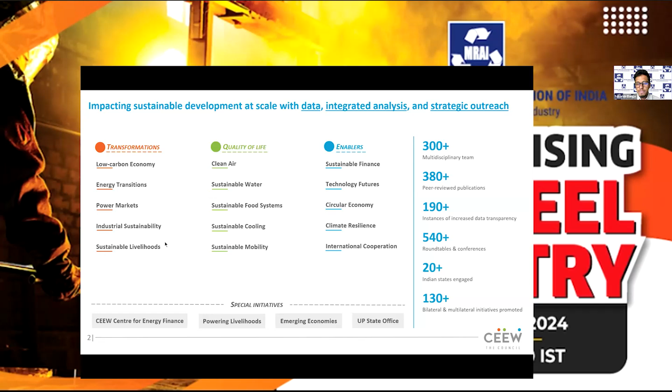In 2020 - so about 4.5 years now - I've been working on steel decarbonization, among other topics. Our team has been working very closely with the Ministry of Steel in developing new policy for green steel production in the country, and we've been involved with deliberations and discussions with several committees within the ministry for the past 2.5 years. Based on our research and discussions with industry, I'd like to present today about the different pathways and what likely pathways are going to happen for the Indian industry to decarbonize. Also considering the country has set a net zero target for the year 2070, we don't have much time left.

I'm sure everyone attending already knows about the general pathways of steelmaking, but for the benefit of those who don't, here's a short slide on the two broad methods of steelmaking. The first is the oxygen route, or integrated steelmaking, where iron and metallurgical coal, also known as coking coal, are melted together in a blast furnace, producing pig iron. This pig iron, along with some scrap and alloying elements, is charged into a basic oxygen furnace, where you control the amount of carbon in the iron and get steel.

The other process is called electric steelmaking, or DRI-based steelmaking. Here, you don't necessarily melt the iron, but reduce it under high temperature in a furnace to get direct reduced iron. You can use any type of non-coking coal, like regular medium-grade coal, or there are processes that use natural gas. The resulting iron is then melted in an electric arc furnace, or an induction furnace, to reduce the carbon content and produce steel. DRI can be produced with both coal-based and gas-based processes.

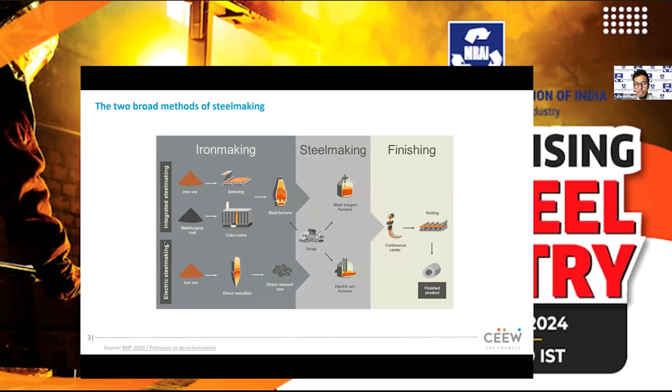We're really trying to retrofit existing designs with new technologies and fuels, and they can only go up to a certain amount before it becomes difficult to control the process normally. There are multiple different pathways or routes of steel making based on how you combine the different technologies and types of raw materials, but we can broadly say that these are the two big pathways.

Coming to the Indian industry, it's the second largest in the world. We have more than 150 million tons of crude steel production capacity, and we produced actually more than 120 million tons in the 21-22 financial year. And the big story for the decade is that we plan to double our steel making capacity by the 2030s. So there's going to be a lot more steel coming out, which means a lot more coal and iron ore going in. So then the challenge is, how are we going to grow sustainably if this is how much our demand for steel is foreseen by the industry?

In India, there are 5 major steel making routes as we see it. So there are some oddities - there are one or two plants here and there that use entirely different technology, but then we just combine them into the most relevant category for simplicity.

You have the BF-BOF process, which, as I mentioned, uses iron ore and coking coal. You have the gas-based DRI and EAF. You have the coal-based DRI with the EAF. And then you have the coal-based DRI with the induction furnace as well, called the IF. And then you have induction furnaces that purely melt scrap steel and produce recycled steels from scrap.

So the interesting thing about the Indian scenario is that the electric route has a higher share of final crude steel production than the oxygen route, which is contrasted by the rest of the world. If you take the world average of steel production, more than 70% of the steel globally is produced using the BF-BOF route, and only about 30% is coming from the electric route.

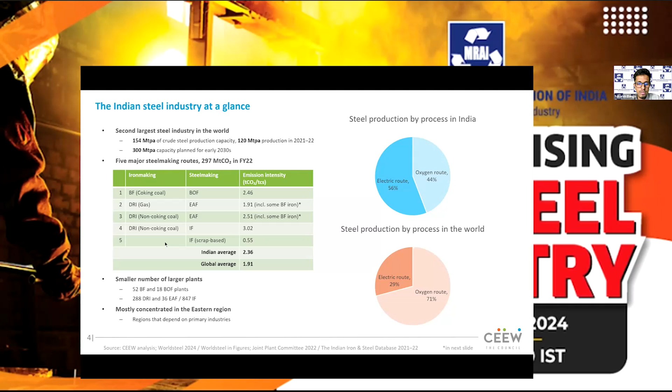Now, there is an asterisk here where I say including some amount of BF iron, and I'll just show you why that is the case in the next slide. Because while we do talk about processes in sort of compartments - that oh, this is BF-BOF, this is DRI-EAF - it doesn't work like that in practice. There are lots of combinations that industries adopt based on the equipment they have available, based on the quality of steel they want to produce, and how they control the processes within the plant. So if you see the arrow marked number 1, you see that some amount of iron from BF goes to EAF. It's not necessary that it's only a BF-BOF process, right?

This is because some plants also charge pig iron from the blast furnace into EAFs, primarily to reduce electricity consumption in the EAF and also to somehow control the quality of steel coming from the EAF.

Arrow mark number 2 shows some very small amount of coal-based DRI-EAF capacity in the country. This is primarily in large integrated steel plants with multiple technologies within the same facility. They will have a blast furnace, a basic oxygen furnace, some DRI kilns, and electric arc furnaces. This is simply based on the economics, how the industry grew, and what grades of steel they produce, so they mix and match processes to suit their needs.

The third is probably more interesting for our cohort here on scrap. Every steelmaking process uses some amount of scrap. 10 to 15% of scrap is blended with iron when it goes into the steelmaking process, but this can go much higher. If we're able to recycle scrap, that's a win-win because we get rid of waste materials and produce new steel without having to mine new coal, mine new iron ore, and cause a lot of supply chain issues.

Based on the current configuration of these industries, the technologies available to us, and the best-case pathways for decarbonization, I personally see three major routes for how our industry could grow and decarbonize. The first route is to use existing technology, to grow using the existing coal-based BF, BOF technology, which is what industries are primarily erring towards for capacity expansion. Most of it is based on BF, BOF technology coming in.

We can take this existing technology and deploy the best available practices and technologies for improving energy efficiency. We can put in better process control, more efficient drives and systems, better cooling mechanisms. All those things we can do. We can replace whatever power consumption comes from the grid or from a coal-based power plant with renewable power, and then potentially blend some amount of sustainable fuels with coal or sustainable raw materials with iron ore to reduce our emissions. However, this is limited by the process, and whatever remaining emissions there are, we go for carbon capture and utilization or carbon capture and storage.

The second route is to deploy gas-based capacity, because the gas-based technology that exists for DRI and subsequent steel production can switch to green hydrogen incrementally. There are companies who claim they already have commercialized technologies that can use entirely green hydrogen for producing steel. So that gets rid of the coal problem and the coal-to-gas switching problem, which is a limitation in terms of technology. We use a technology that already uses gas, switch from natural gas or gray hydrogen to green hydrogen subsequently, and whatever other energy comes from electricity, we switch that to renewable. So then we produce clean steel.

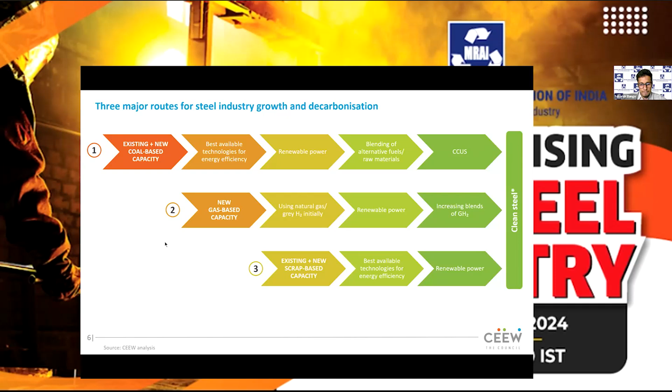Let's take the first route as an option. If we look at the existing capacity and existing technology, there is going to be a heavy reliance on carbon capture for decarbonization. No matter how efficient you make the process, no matter how much alternative fuels you blend, they're only going to go a certain amount of the way to decarbonize, because this is an existing, well-established technology that has evolved for centuries. There's only so much you can do in terms of augmenting an established process to reduce its emissions.

You can't simply switch out coking coal for green hydrogen, for example, because that's not how that technology functions. You need some amount of solid fuel in that blast furnace so the process happens normally, so that the weight of the iron ore is borne by that coal bed at the bottom. That means you can't simply replace a solid fuel with a gaseous fuel and try to reduce your emissions.

Even if you switch your entire electricity consumption to RE, the electricity consumption is only a small part of the emissions from the whole process of steel making. Even if you switch your existing capacity to RE and put in 6 gigawatts of new renewable power, round the clock renewable power - and round the clock is important because steel plants operate round the clock - you can't have a solar power plant producing peak power at 2 p.m. and then tapering off, relying on the grid again.

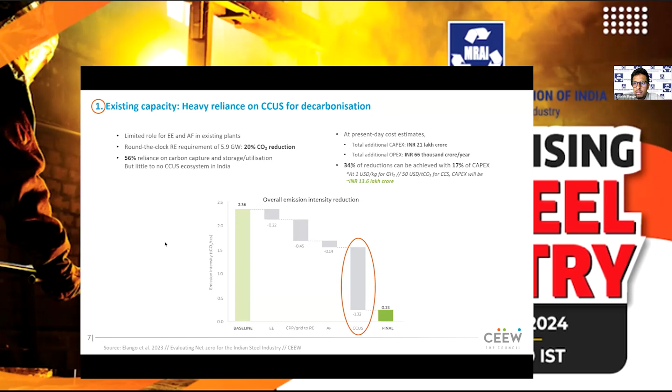However, if the cost of CCS declines, if it becomes $50 per ton of CO2 from the 90 or 100 that it is right now, we could potentially be looking at a bill of 13 lakh crores rather than 21. That is still a large sum of money, and we need to plan where we get the money from and how we will put it into the ground to develop these technologies in the coming decades.

On this slide, I won't dwell too much, but essentially it's saying that if you try to produce clean steel, that is near net zero steel using existing technologies plus CCUS, it would probably be 40 to 70% more expensive to produce at current prices. And if the cost of CCS declines from 90 to 50, it could still be 20% more expensive than it is currently. That's not a small number. 20% is a lot. So steel that costs 25,000 rupees to produce would become 30,000 rupees, with knock-on impacts in every other sector that uses steel.

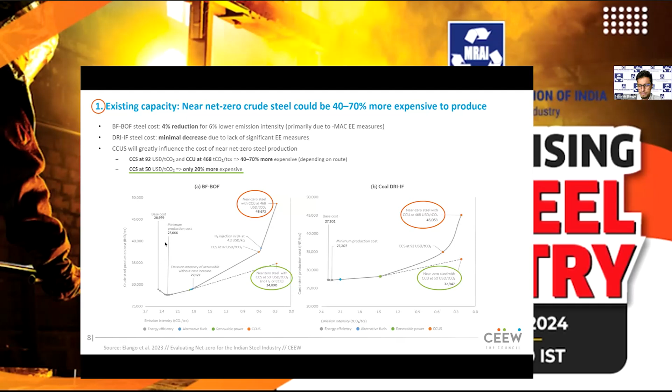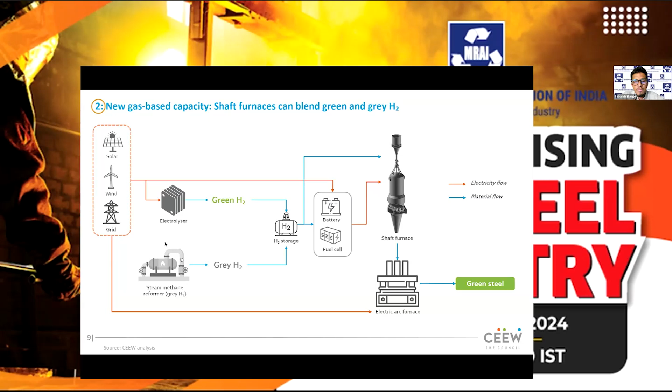What about the second route? If we look at hydrogen-based steel making, we can do that. There's already a plant in the country, actually a couple of plants, that use gas-based technology. Let's say we take a shaft furnace, which is the gas-based technology to produce DRI, and instead of using natural gas, we use gray hydrogen. Gray hydrogen is produced by reforming natural gas and costs much less than green hydrogen. So let's say we operate a shaft furnace using gray hydrogen, put that into an electric arc furnace powered by renewable energy, and then subsequently blend green hydrogen into the process going forward.

This chart is a little confusing, but the key messages are on the left. The new gas-based furnaces are already capable of using green hydrogen, so we can initially run them with a combination of gray hydrogen and RE, reaching emissions of around 0.9 to 1 ton of CO2 per ton of crude steel, right down the middle of the chart on the right. Then, as you keep blending green hydrogen with gray over time, you'll reach 100% green or clean steel. The cost premium will keep going down as the cost of green hydrogen reduces. So if you take a 2040 case, the dark gray line, blending 90 to 95% green hydrogen, you could be looking at emissions of only 0.3 tons of CO2 per ton of crude steel.

Another interesting insight from this graph is that if you read it from right to left, towards the very end, prices go up substantially. This is because producing 100% hydrogen-based steel requires producing hydrogen round the clock, meaning you'd need round-the-clock renewable energy. That means the cost of energy storage, the most expensive component, goes up. So if you blend 90% green hydrogen, you can do away with a certain amount of storage and have the rest come from gray hydrogen. But for 100% green hydrogen-based steel, you'll need a lot more marginal storage to deal with the intermittencies of RE, which drives the cost up. This is a strategy we have to evolve with time based on how storage prices reduce, how green hydrogen production costs reduce, and how we can effectively blend green and gray hydrogen in a shaft furnace.

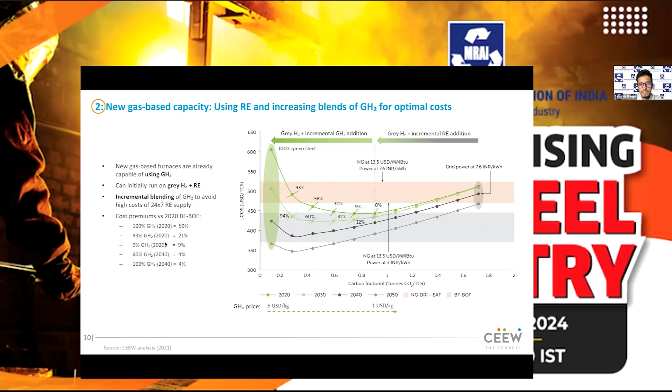And now we come to the third case, scrap-based capacity. Here, how would we go about augmenting the supply of scrap, and how would we go about supplying renewable energy to these people? 10 to 12% of scrap is charged with iron in all steel-making furnaces in the country typically.

Importantly, more than 10% of the steel produced in India is produced primarily through the scrap recycling route. These might not be very high quality products, but still it counts nonetheless. India consumes 25 to 30 million tons of scrap annually, of which around 5 million tons is imported scrap, because we simply do not have the logistics to make domestic scrap recycling work to the scale that we needed to. And as I mentioned earlier, a large part of the scrap is actually generated within the plants, so you can't even say that it's end-of-life steel that counts for zero emissions.

There's a lot of scrap also generated from shipbreaking in India—India is, I think, one of the world's largest shipbreakers. We need to formalize that sector such that large amounts of steel scrap are available from a particular location, which makes transport and logistics cheaper. So how would we augment supply?

Shipbreaking is something we already discussed, but the recent vehicle scrappage policy instituted by the government is having high hopes for the steel sector, because there are a lot of formalized scrap recycling sources that will be made available by way of vehicle scrapping centers. That means it's going to be formal, higher quality steel used in automobiles, and that means logistics and transportation will also be cheaper and more efficient. So this is how we are looking at augmenting scrap supply right now.

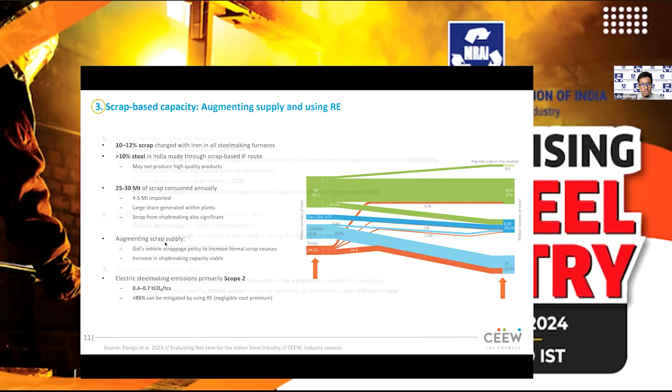So now we have 3 questions in the end. Overall, how are we going to grow? Is it going to be using existing technology? Or are we going to build gas-based capacity and switch to green hydrogen later? Or are we going to prioritize scrap-based steel?

If we look at the first point, most of the new capacity that is going to come in is going to be based on coal-based capacity. This is what we have come to know from industry and various stakeholders—because of issues with availability of natural gas and the prices of natural gas currently prevailing, industries are saying they can't produce competitively priced steel using the gas-based route right now.

And even though it might be great for the future in terms of easing their transition, today's demand and today's market still influence today's decisions. That's what I can say about this. And so because we are going to expand using coal, we will soon have 250 to 300 million tons of capacity running on coal.

That means much more reliance on a CCUS ecosystem that doesn't exist. So if this is the way we are going to go, we have to urgently develop CCUS policy for the country, and urgently develop indigenous technologies for carbon capture and utilization that do not rely too much on imported technologies that drive up costs.

And we need to be aware of the fact that RE, alternative fuels, and energy efficiency, while they don't individually do that much in terms of reducing emissions, are collectively very important for at least dealing with half of the emissions coming from this technology. And this is not even delving into the issues regarding coal supply, coal quality, iron ore supply—I'm not going to comment on those at this stage.

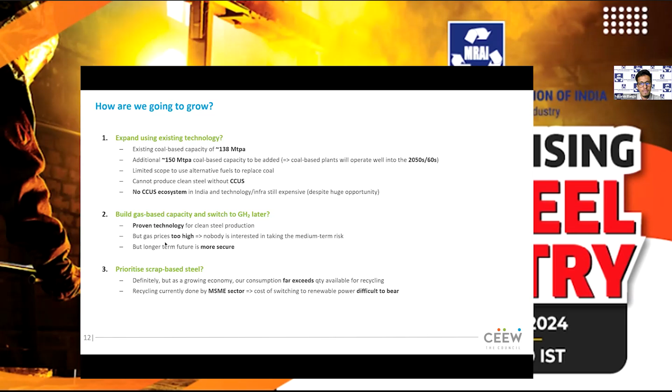That was the end of my presentation.

Good. Thank you very much for the kind introduction earlier, Commodore. I'm going to rapidly go through the slides here because it's way in excess of the amount of time that's allotted, and some of the information I'm going to present has already been spoken about.

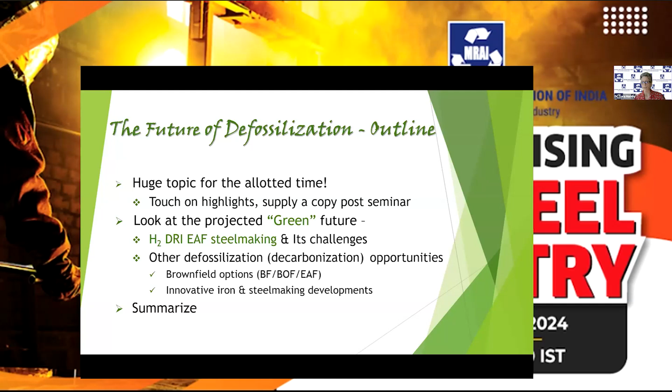As we all know, the International Energy Agency, IEA, in Europe has projected the new future to be hydrogen DRI melting in an electric arc furnace. But there are some major challenges with that, which I will go through, and look at some other defossilization options for the brownfields, and look at some of the new innovative technologies coming up before I summarize.

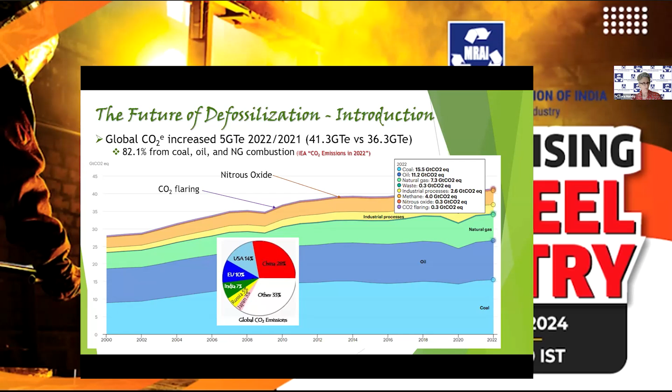We all know we've got a problem meeting the 1.5 degrees C target. Last year, 2022 over 2021, increased the CO2 equivalents by 5 gigatons, and most of that, 82%, was coming from coal, oil, and natural gas combustion. China, of course, is the largest problem because of the intense blast furnace usage. USA is second, then EU and India at 7%.

We, as a steel industry, have the second lowest carbon intensity for metals production. The major emissions are predominantly from the blast furnace at 1.3, then the coke. Third is the electric furnace at about 0.24.

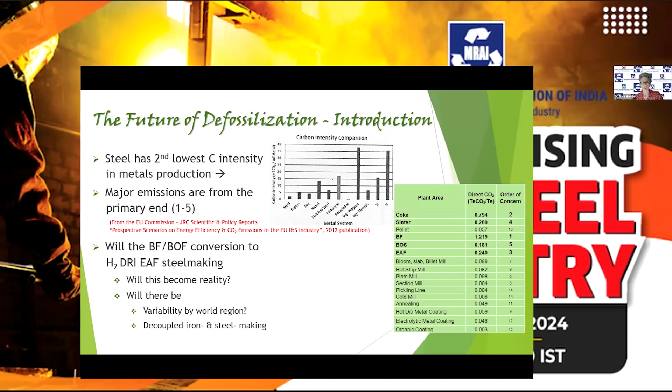The question has become whether the blast furnace will convert to EAFs, and whether there will be variability around the world because of the infrastructures throughout the world, and whether we need to decouple the iron making and the steel making.

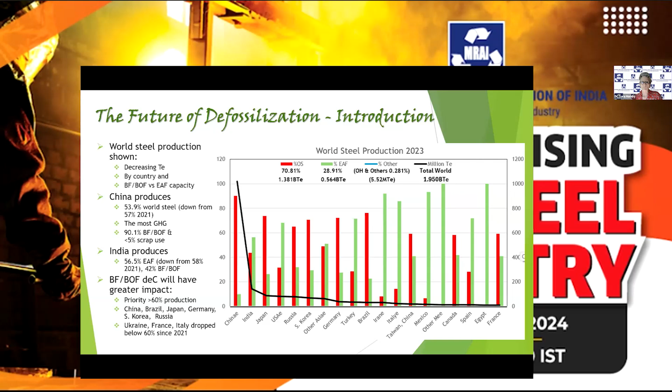This is just the 2023 world steel production from the World Steel Organization. The red is the BOF blast furnace, BOS route. The green is the electric furnace. The black line is the tonnage from each of the countries. We all know China produces the most—it's actually dropped to 54% from 57% in 2021. The greatest impact is going to be addressing those countries that have over 60%, or even 50%, blast furnace use.

The Paris Accord is demanding 0.2 tons of CO2 per ton of steel by 2050. We're now at about 1.7. We've already seen the 7% greenhouse gases, 11% CO2 coming from the steel industry. Blast furnace accounts for 92% of the greenhouse gases from the steel industry, yet it's only producing 72% of the steel.

If we look at the strategy for 2070 from the IEA, they're looking at 95% hydrogen DRI, but the problem becomes the build rates—sorry, the sourcing of the green consumables, prime scrap availability, and the DRI ore quality. We're also going to have big problems with zero carbon DRI in the arc furnace, which is inherent with 100% hydrogen, the lack of CCUS tonnages throughout the world, the geographical viability of actually sequestering it, and the socioeconomic impact of closing blast furnaces.

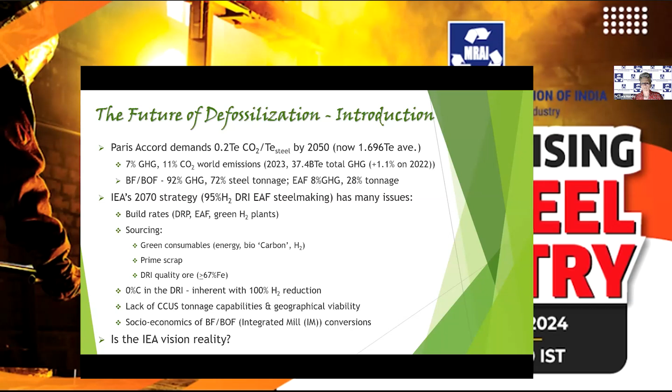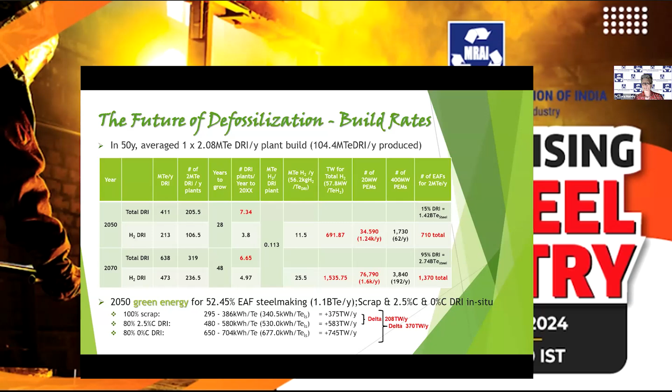That's 1,240 20-megawatt PEMs per year for construction. And added to that, if you go to the extreme and put 80% zero carbon into the electric furnace, you're going to need another 370 terawatts of power to actually melt the material.

We need green hydrogen, we need energy carbon replacement, and prime materials. For the economics of hydrogen use in steelmaking, we need to see hydrogen at less than $2 a kilogram, and it's currently between 3 and 8, depending on which part of the world you're in. We also need energy to be much, much less than $20 per megawatt.

Production is insufficient. By 2050, with 213 million tons of DRI, we need 11.5 million tons of green hydrogen. In 2022, only 0.11 million tons were green, which was a 44% increase year on year.

The figures for 2023 production of green hydrogen I couldn't find anywhere, but electrolyzer capacity had doubled to 8 gigawatts. In December 2023, 45 million tons of clean or green hydrogen projects had been announced, but the investment was $570 billion.

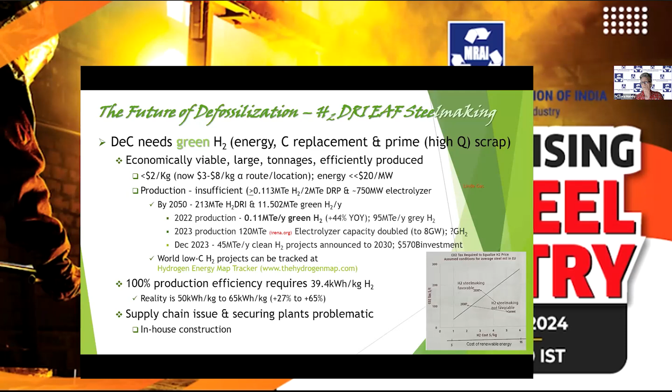In terms of energy, a great source is the Global Energy Monitor. I'm sorry you can't see everything underneath the pictures on the right. What I did was take their energy monitor graphs and superimpose the actual production in 2022 and 2023, so you can see the difference in terawatts produced by different methods.

Basically, if we go green in the industry, especially the electric furnace, we will save up to a kilogram of CO2 per kilowatt used. In 2022, we were looking at almost 180,000 terawatts of total energy produced.

They announced 60 gigawatts of green capacity coming on by 2030. Renewable energy was only 29% that year. In 2023, renewable energy increased slightly to 30%, but it was down slightly because of the drought in China.

The current additional capacity reached 0.5 terawatts. There's not enough green energy at the right price. We need a 50% reduction in pricing, and we need a $2 trillion investment in renewable energy. We're going to need 2 terawatts for every 2.5 million tons of steel per year produced.

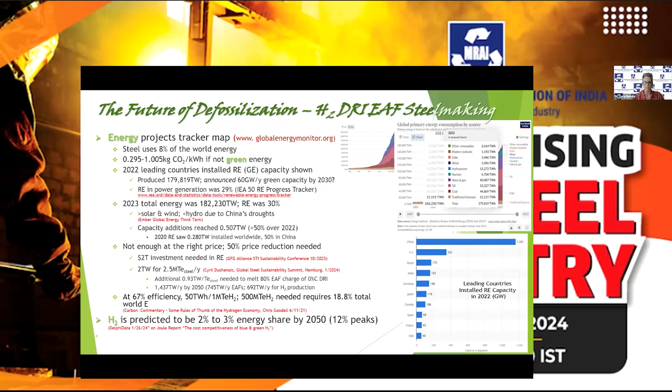For carbon substitutes, we're looking at 95% efficiency of the carbon contained in either pig iron or DRI as it comes into whatever melting furnace. We need that carbon currently for chemical energy, for foamy slag production, and for recarburizing in certain circumstances.

People are looking at replacing it with biochar, plastics, rubber, and municipal waste. Firstly, there's not going to be enough sourcing for that. But also, most of the research to date has shown that you need carbon injection with whatever the replacements are for it to work in an electric arc furnace.

In terms of CCUS capabilities, it will address 54% of our hard-to-abate fumes. However, it's a relatively high conversion cost because you need carbon-free hydrogen to chemically stabilize the CO2, and the fixation is limited. Sequestration, as we've already heard, is geographically challenged.

And if it's not mineralized, it's going to be temporary. The end users are predominantly food, chemical, and enhanced oil recovery industries, and they can't use all the CO2 we could convert, so we need to find other uses.

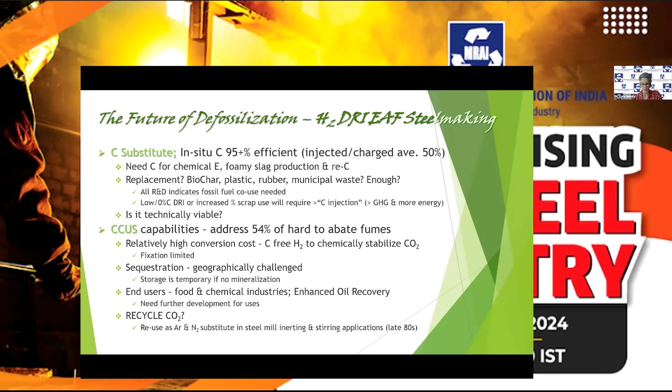One question I asked a long time ago - we had done a lot of work putting CO2 in place of argon and nitrogen in various steel mill and other non-ferrous applications. We found it to be very efficient in terms of inerting, stirring, and even in an AOD vessel. So that's an option for using the CO2.

Ore quality is another big issue for the world. Only 3 to 4% of the DRI is greater than 67%. The quality is deteriorating - the iron content has already dropped 2%, silica and aluminum have increased 2%, and phosphorus is going up by 0.02%.

Upgrading the Pilbara ores in Australia - and Australia is the largest producer, as you can see from the graph at the top there - is an issue. So they're looking at potentially redirecting it to a submerged arc furnace and then on to the BOFs.

There's an increasingly low availability of lump ore, and a lot of people are now restricting the ore to their own internal markets. The other option, of course, is to develop new process routes for the beneficiation of the ores.

Swinburne University and CSIRO in Australia have looked at this, and they've developed a lab-based pilot plant for fluxed magnetite pellets, which potentially reduce the cost of processing. It reduces it by one step, and it also does the magnetite processing at a lower temperature than normal.

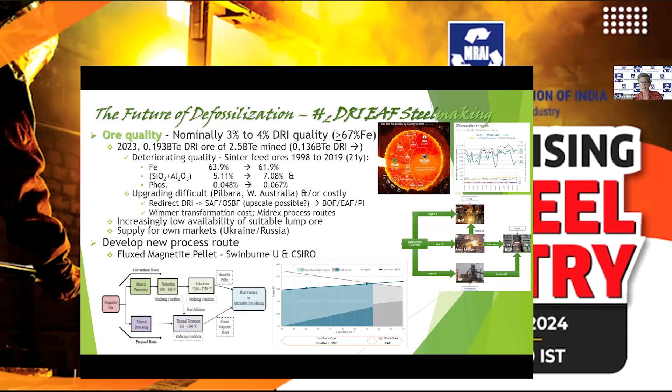Scrap, we've already talked about quite a bit. Most product issues ultimately can be traced back to the melt shop and the scrap quality. The scrap quality will define the amount of OBMs required in a furnace, and the little chart at the top shows the need in the US predominantly for good quality DRI, HBI, and scrap to make auto sheet.

The continuous recycling of scrap is going to be a big problem because it's going to increase the copper significantly. We've already seen an increase of 0.12 from '82 to '19. We can shred the scrap to make sure we remove all the copper coming in from the auto scrap. It also densifies it, cleans it up, and gives us a better yield.

One of the issues I've complained about for many years is that scrap is not sold to exacting qualities like ore is, and we need to motivate, in North America especially, the scrap dealers to guarantee quality coming in. I've seen a lot of problems in furnaces where the mix has been back-mixed to give a standard quality, and it's caused problems. So we also need to have a continuing analysis of scrap coming in.

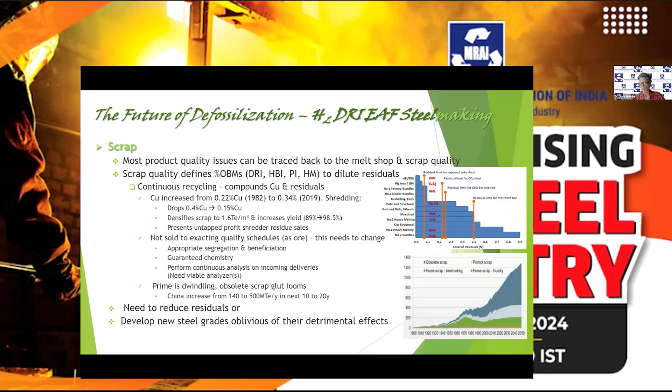We're going to use a scrap-based process, and we need to look at reducing the residuals somehow. There's a company in Canada looking at chemically reducing the copper, but it's still under development. Or we need to look at new steel grades that are oblivious to the detrimental effects of these residuals.

If we have zero carbon coming in from 100% DRI, we're going to have some major challenges. Without the chemical energy and the chemical carbon reaction capabilities, we're going to have incomplete reduction of the FeO, less metallization, and more gangue in the furnaces.

If we have lower carbon steel, we're going to have more FeO in the slag and lower yield. We're going to have higher melting temperatures and more electrode wear. And when we're injecting carbon equivalents, we're going to need twice as much because of the lower efficiency.

We're going to need to redesign the refractories in the arc furnace because the carbon in the current bricks is going to basically dissolve. There's going to be slag erosion, and we're going to need a much deeper bath for the chemical reactions to take place.

We're going to have more slag formers and more disposal weights. We're going to need to stir the bath because it's going to be too deep for the electrode energy to stir it, so we're going to have plugs, tuyeres, and injectors in place. But we could also use CO2, which would reduce the need to make argon and nitrogen.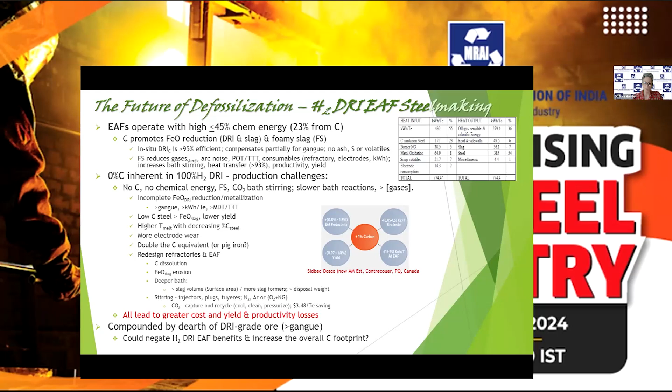All of this is going to lead to higher cost, and yield and productivity losses. And it'll be compounded by the lower quality ore that's available out there right now, and it'll increase the carbon footprint.

Transition costs are exorbitant. There's some numbers here from Arcelor, POSCO, Thyssen, and Algoma Steel. I calculated from the IEA's own numbers that the cost of liquid steel would be $1,327 a ton. And the CRU actually quoted crude steel product at $3,700 per ton if we went the way they wanted to go, and that would make us not competitive worldwide.

If you skip down below the 2021 and 2022 comparisons, I put 2024 numbers there. The USA is currently producing hot roll band at 839, Western Europe at 680, world exports 580, and China is at 448. So competitiveness is going to be a big problem if we don't have taxes in place for the dirty steel coming in from China, for example. And then there's additional costs for the blast furnace closures because of the downsizing and social implications.

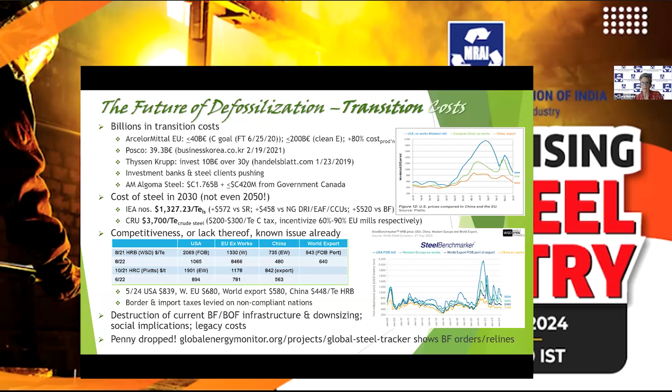Now, if you look at the global steel tracker, it's obviously been observed because there's a lot of blast furnace orders and relines going ahead. This is just showing a chart of the different research areas being looked at, the electricity, the carbon, and the hydrogen, and different projects are assigned here. Basically, it's biomass, CCUs, hydrogen reduction and production, electricity.

They're also looking at upscaling the old non-steel technologies, the SAFs and the OSBFs, and bringing induction furnaces up to mass production, which I doubt will happen. The challenges are increased energy, the scalability, which is a big problem, timeliness to market, and we've got an issue with the Chinese techno-economic advantage for hydrogen and green energy.

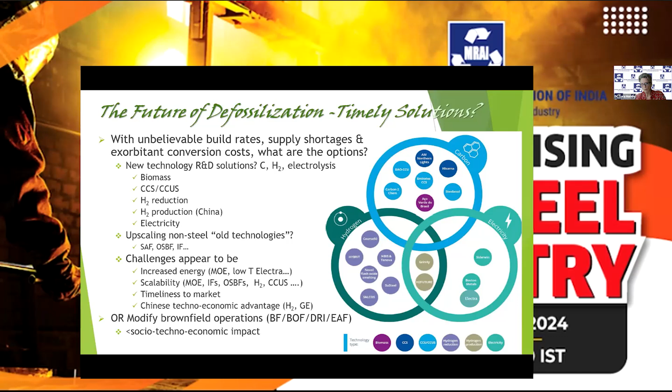But we could also look at modifying our brownfield operations, which would be less impactful for the socioeconomic issues. The blast furnace iron making - we talked about best available technologies. We could intensify the metallics use, which would particularly mean scrap and HBI into the blast furnace.

They've seen reduction in coke, they've increased productivity. We could look at biochar substitution for the coke and PCI, hydrogen partial replacement of the natural gas or the hot blast to the furnace.

And Hatch has predicted with PCI at 35 kilograms of 900 degrees C hydrogen that you can get 20% reduction in CO2, an increase in energy in the steelworks, a further 100 kilograms of coke reduction, but it's obviously going to be very costly. Adding to that, top gas recycling and CCUs, you get an 80% further reduction in CO2, which would put the tons of CO2 per ton of liquid steel close to that of the electric arc furnace, and probably twice that of the potential hybrid hydrogen DRI route.

They found that pellets, of course, will reduce the CO2 by 85%. And the Japanese, with their Course 50 program, have got 30% CO2 reduction improvement using hydrogen, coke oven gas, and CCUs, and they're aiming for 50%. At the bottom there, Kobe Steel has reached a record for coke at 239 kilograms of coke per ton of hot metal, using 20% lump, 80% self-fluxed dolomitic pellets, and PCI at 220 kilograms per ton of hot metal.

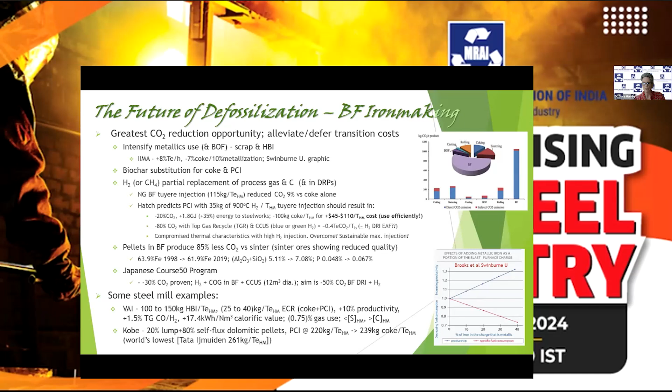Increased scrap use again in the BOF. There's two charts on the right-hand side from Swinburne University - they've been doing some work on increasing the amount of scrap used in the BOF. The current world is 17%, and in actuality, in the past, 45% has been used, but wasn't sustainable because of scrap. Their program was built on actual data from the steel mills, and for 35% scrap charge, they had a heat loss of less than 0.9%, but with the 10% scrap charge, the heat loss was 6.75.

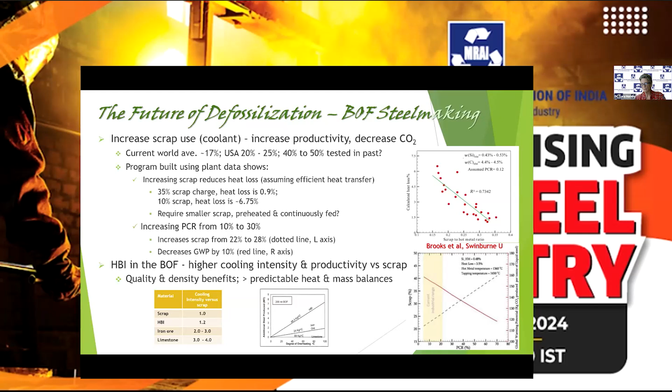Obviously, for the future, looking at using more scrap would require smaller pieces of scrap, potentially preheated and continuously fed to the BOF. If you look at increasing the PCR from 10 to 30%, which is the bottom chart, and the increasing scrap from 22 to 28%, which is the dotted line going upwards, you can decrease the global warming potential by 10%. Also, HBI in the BOF is going to have a higher cooling intensity and productivity impact.

Electric furnace - green energy is the key, we've already talked about that. In 2023, we could have saved 212 million tons of CO2 a year just by going electric for the arc furnaces for the world. If we go with 100% scrap, as shown in the middle chart here, you're melting with renewable energy, you're down to 0.18 tons of CO2 per ton of steel.

Any use of the OBMs will increase that. The maximized benefit is obviously to use 100% scrap if you can get the quality, and then, as I said earlier, pay for quality, improve your yield. You can also use preheated combustion air - we used to have a system when I was with Air Liquide, and we saw reductions from 480 to 280 kilowatts per ton, and the meltdown time came down 16 minutes using preheated air or oxygenated air.

Hydrogen substitution, of course, in the oxy-fuel burners is an opportunity also to reduce further, but that's a minimal amount of power compared to the power reduction. The other big issue that I have is a lot of steel mills are not using value in use of the materials that are going into the furnace. There are programs out there that will tell you what scrap mix needs to be with pig iron or DRI to give you the lowest cost liquid steel.

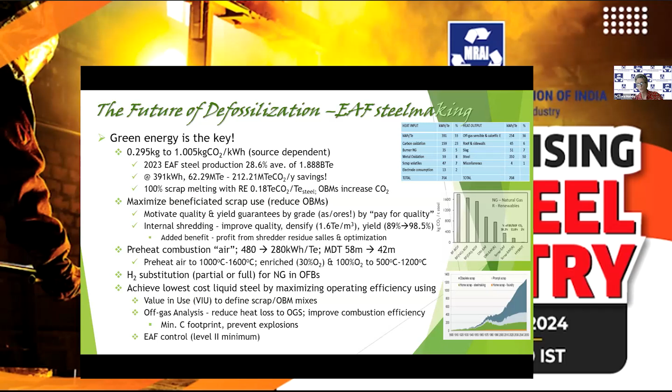Off-gas analysis is another biggie. It will reduce your off-gas losses and balance your furnace for improved combustion efficiency and operation, and minimize your carbon footprint. The other big issue is the control level on the furnaces needs to be level 2 at the minimum.

Quickly, for some of the new technologies out there: Calix is a new one in Australia. It's fines based, indirect heated, and they only use hydrogen for reducing the fines, at less than 1,000 degrees. They've got a study currently for a 30,000 ton a year demo plant, and they've only been around 2.5 years, but they've done incredibly well. They're testing Australian ores because they're lower quality, trying to upgrade them. They have a steel process they can feed to, and also this Leilac kiln, which is a zero CO2 lime kiln. Basically, they're looking at converting Australian exports from ore to HBI.

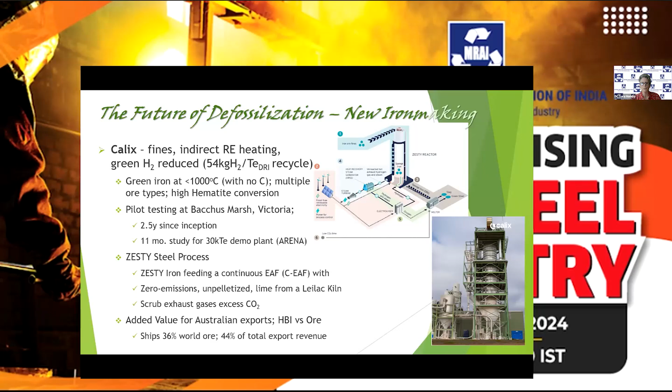I'm about to lose my computer because it's not plugged in. I'm sorry. Come on, it won't allow me to do anything at the moment. Okay, let me get these.

Sorry about that, I'm having trouble with my computer battery failing. I had forgotten the other two technologies that are a big deal right now: Electra, which is producing a 1 meter square iron plate, though I don't know the thickness, using electro-hydrometallurgical processes.

They think they're reducing CO2 by 90%. They can use low-grade ores below 55%.

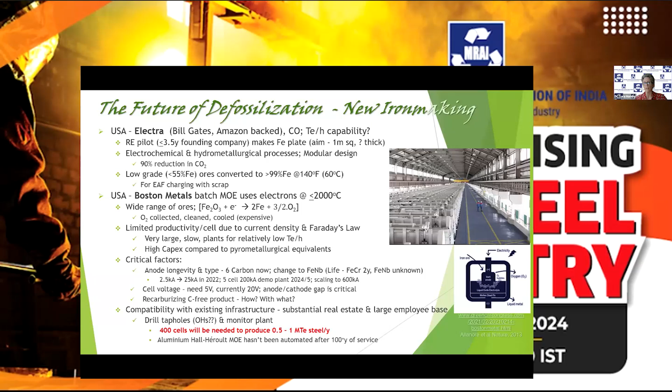Boston Metals is an MOE process using again a wide range of ores, processing temperatures of 2,000 degrees. They're limited by Faraday's law for the productivity per cell, and they have some major critical factors. The voltage is at 20 still, and they need to be at 5. They have an anode that's currently 6 carbon anodes. They hope to change to ferroniobium but haven't done that yet. Government has funded them a new plant to make the anodes, but they haven't done the work or research yet. The big issue is going to be that 400 cells will be needed to produce what they're now saying is 500,000 tons of steel a year. Originally it was 1 million tons.

We have the Hyfor process by Primetals, a fluidized bed using preheating, oxidation, and reduction, at 900 degrees C. They're supposed to have an industrial process going with Fortescue Metals and putting it to an electric melter, but the question now is whether the downsizing of Fortescue is going to compromise this pilot. It's cost effective again, like Calix, because there's no pelletizing and sintering.

Hybrit, of course, is the most well-known new process of hydrogen DRI EAF steelmaking, green energy. They're putting a 1.3 million ton plant into Gällivare in Sweden, up and running by 2026. They have proven lined rock cavern storage for 100 cubic meters of hydrogen at 250 bars. But in future they're going to need 120,000 cubic meters, representing 100 gigawatt hours of energy, enough for 3 to 4 days of operation.

There's no real technical data out there, other than they've actually supplied customers with green steel, but there's no information on how the plant operated. They do say they reckon it'll reduce CO2 by 30 to 50 million tons a year.

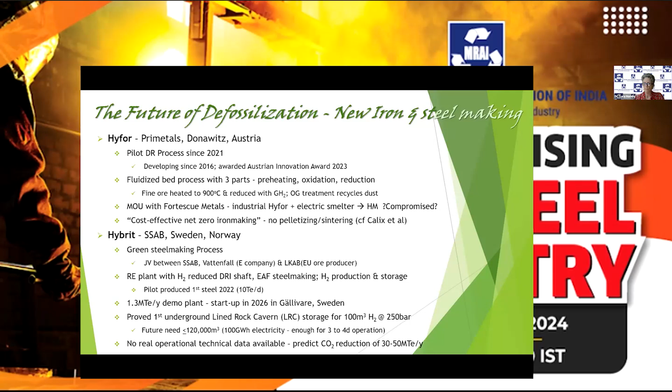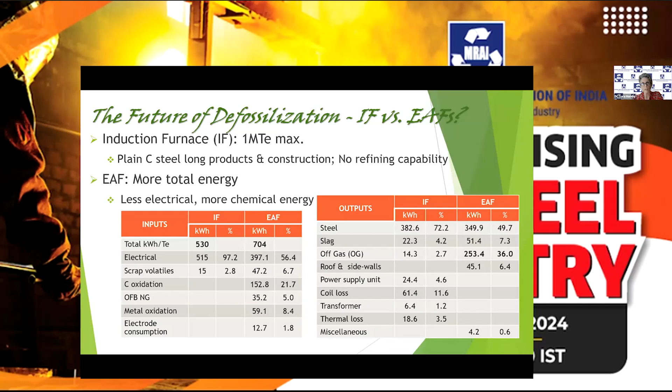Induction furnaces were mentioned. We're looking at probably 1 million tons max per year for plain carbon steel because of the lack of refining, although it could go to a secondary metallurgy system. Arc furnaces use more total energy but less electrical. One big issue with induction furnaces going to larger production is the need to change the furnace lining on a regular basis, because it's much thinner to start with and will wear much, much quicker.

So in summary, the need for defossilization has spawned a lot of innovation. The question is whether the new technologies will be timely enough, but we're already behind this 1.5 degree C goal.

Hopefully some of the known technologies that are non-ferrous can be upscaled for us, but that's questionable too. The hydrogen DRI EAF steelmaking is the cleaner technology, but providing the green consumables and dealing with the cost has become a problem across Europe.

Some plants already are at the point of deciding they will not convert. There are more solutions with brownfields: maximizing metallics use in the blast furnace and the BOF, using the best available technology, trying to find coke or carbon alternatives, and with the EAFs, converting to green energy ASAP and maximizing arc furnace scrap use rather than the OBM use, processing the scrap in-house. You have control of quality, you optimize your charges using the programs, and you use off-gas analysis and value in use to operate the furnace efficiently.

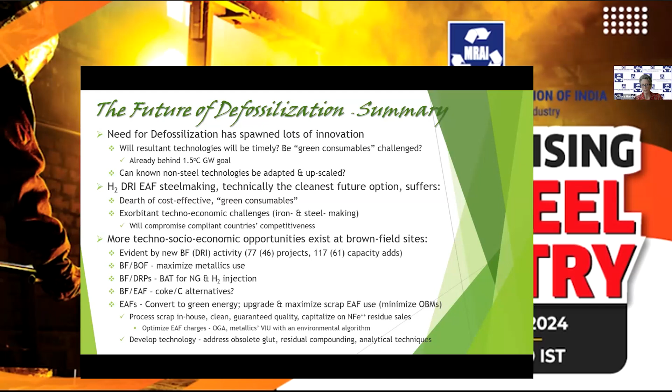Thank you very much, that's the end. I'm sorry to have taken so long, but it is an exciting time to be in the industry, and thinking outside the box is going to be a great way to solve problems for the future. But there's a great statement here from Joachim von Scheele, who said decarbonization without green power means deindustrialization, and I think he's right. Thank you for your attention.

Thank you, Dr. Sara, for that wonderful presentation. I think you covered a wide range of issues in the short time that we have had. But it's important to understand some of the key issues you brought out, particularly the ratios in terms of blast furnace and BOF route: 92% of GHG emissions but producing 72% of steel, and 87% for the electric arc furnace route doing 28% of steel. That's a phenomenal number.

What is very interesting is to also see from an industry perspective how steel prices might go as a forecast. You have put some numbers there from IEA and CRU at 1,327 and 3,700 dollars per ton. That's a huge amount of money to pay, but obviously the downstream impact on the rest of the industry, which are consumers of iron and steel, will also be impacted.

The other thing I thought you brought out very clearly was this wide field of expertise in different parts of the world, working on different options for defossilization, as you call it. There have been some very interesting examples that you quoted. I particularly liked your Japanese COURSE50, where they seem to have got some success. And the Hybrit project in Sweden is very closely guarded, the first RE plant with hydrogen, because they're going to need 100,000 cubic meters of hydrogen to do this. It's not easy, even in Sweden, to get that, even if they use renewable energy. There are plenty of wind farms and all of that, but to get all that amount of green hydrogen is not going to be easy.

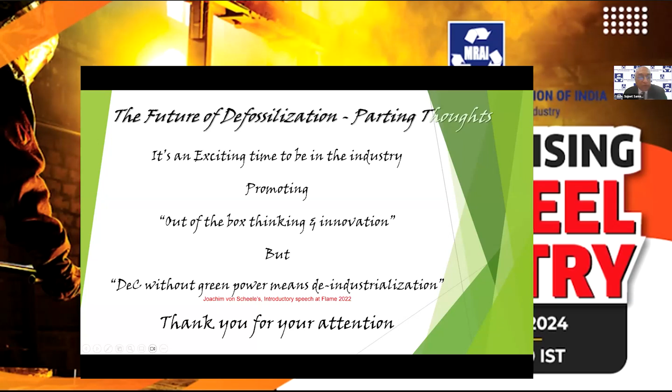But thank you very much for your presentation. I can ask MRAI to get this off the panel so we can get back to some questions. There are some questions in the chat box. If I might start with a few.

The first question is, if the whole world is moving towards, or particularly India, as has been brought out by Sabarish - I think this is the question for you - if there's going to be such a lot of investment into coal-based steel capacity, I don't know what is the ROI on coal-based plants, new plants, and what would be the payback period for that investment. Given the situation you brought out and the emphasis that there would be additional investment needed, if nothing else, as per the graph you showed on carbon capture and utilization being the major line item that could make the impact, the question is how do you see this? Do we see much of our coal-based steel capacity floundering 20 years from now, 10 years from now, 30 years from now? Of course, from an Indian perspective, we have said this on different platforms, a common but differentiated responsibility sort of approach. But nevertheless, there's a substantial amount of investment being planned here.

So maybe is there a need to intervene there? And Dr. Sara, you might also like to chip in on how other countries are looking at additional coal-based steel capacity, and whether they are also sensitized to the fact that these coal-based plants may not be viable from an economic, technical, or sociological perspective. So first, Sabarish, if you can make some comments, and then I'll request Dr. Sara to respond to this, the first question that we got in the chat box.